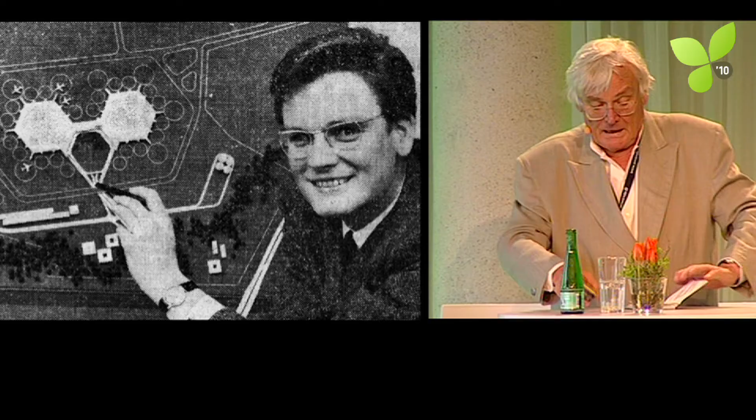It is called TXL Plus. I have to explain what that means. TXL is the code for Tegel Airport, Berlin, which should be closed next year on the 10th of October, because the new airport in Schönefeld, also designed by us, will be finished at that time, and there is a political agreement that the other two airports in Berlin should be closed.

I have to tell something about the background, the history of this project. It is the first large project of our office, and what you see here is a picture showing myself as the winner of the competition in 1965. So this is already 45 years old, like my hair.

I was asked 18 months ago by a representative from the Berliner Senate to make a proposal for what could be done with this piece of land. It is a huge area located very near the center of the city. I think most of you have used this airport one time or several times.

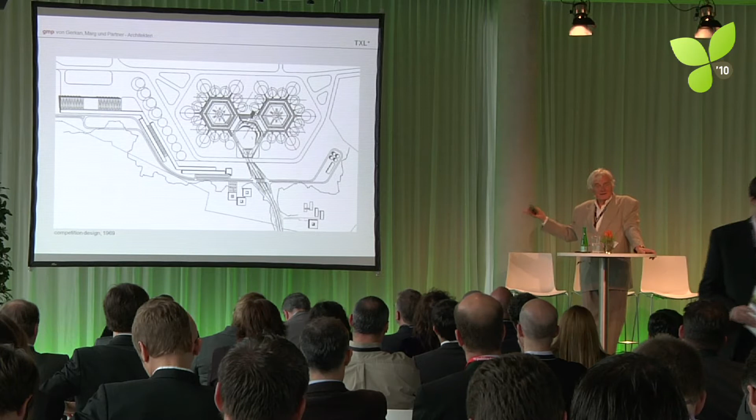That was the original drawing from that time, done with ink on translucent paper. Now we do all this work by computer, but that was at that time. Even then, we didn't learn such good English as you do now, so I beg your pardon if I have some problems explaining myself. I need the pictures - they will speak their own language.

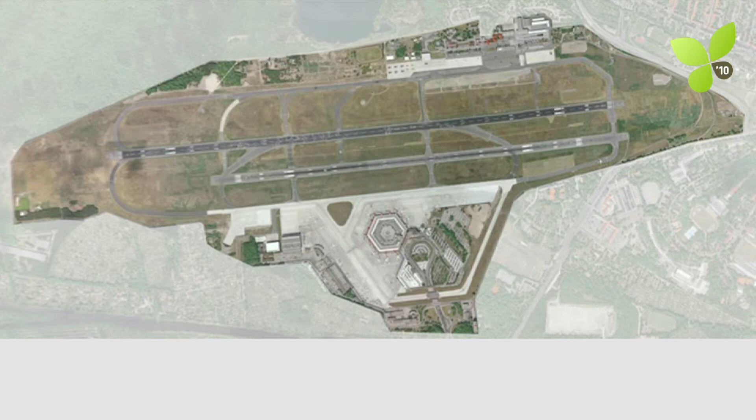My idea was for this whole area - shown here from a bird's view - only the left hexagonal ring has been realized. The second should be an extension, but it has never been realized, and it won't be. The whole area has a dimension of 466 hectares, and only a small part of the whole is covered by buildings.

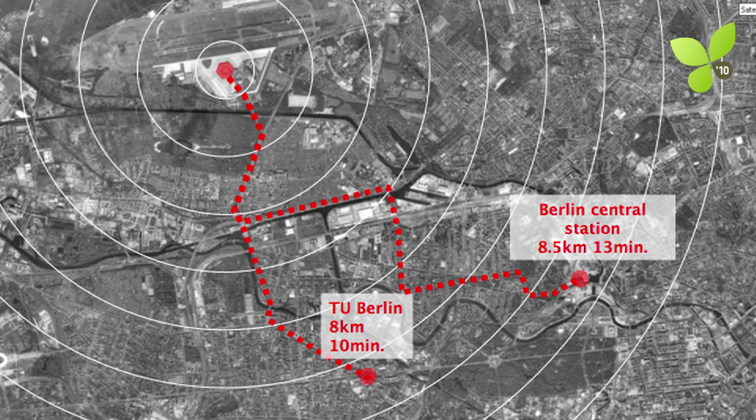All the space would be free to do whatever the city intends to do. I proposed the idea 18 months ago to keep most parts of the area in natural condition - landscaping, greenery - and only the south part and the piece between the two runways should be used for buildings, but for very, very special buildings.

But this whole city shouldn't be just a city. It should show only buildings which are in very tight relationship to the needs of saving energy, of sustainability, and all those aspects - no other building should be allowed. We discussed it for half a year, nearly three quarters of a year, and up to now everybody has agreed with this idea.

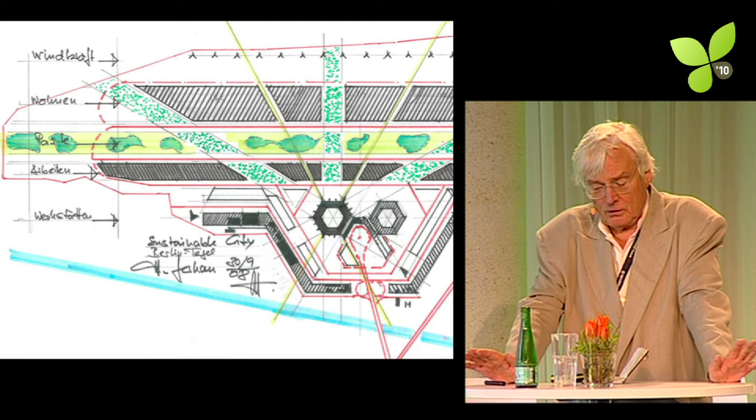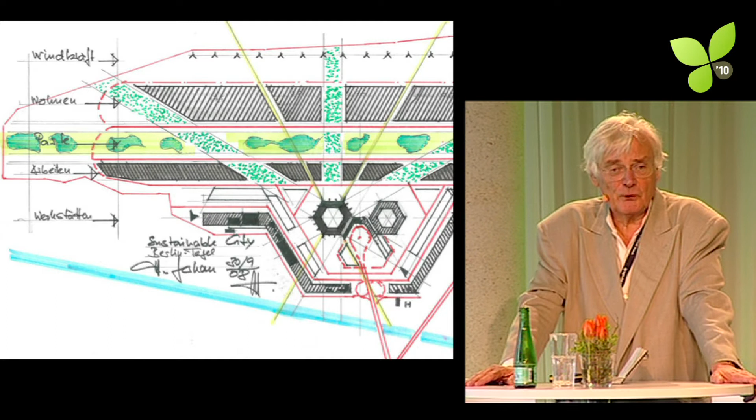There is no dissent between any political direction - they all agree with it, and the only question we have to answer is who will be willing to use this area. When I got to know Mr. Weber on a train, he told me about what he intends to do here, and invited me to give a speech today, and I think you are the clients. You are invited to take part in this opportunity.

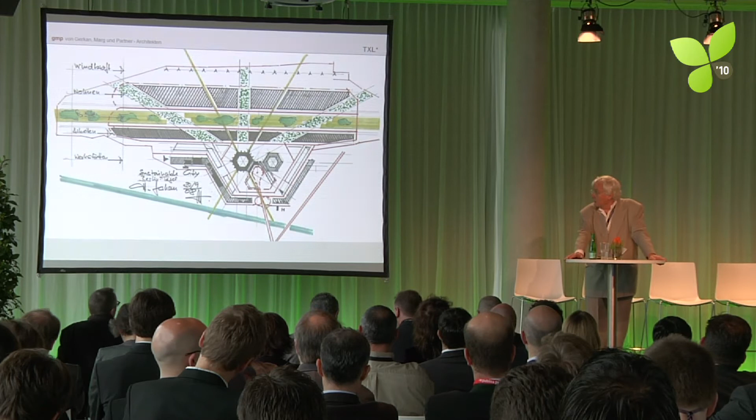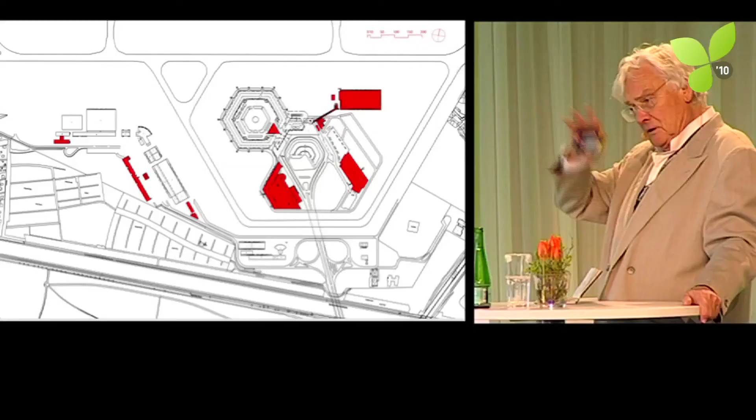You have the chance to go to this place, to have a showroom there, to do research work, and - I'll show this later - you will even be able to have producing facilities in the extension of the whole area. But at least there are some separate buildings which have been built in the meantime, over these 40 years, because the whole capacity at the beginning first stage was only 2.5 million passengers, and nowadays they have 14 million.

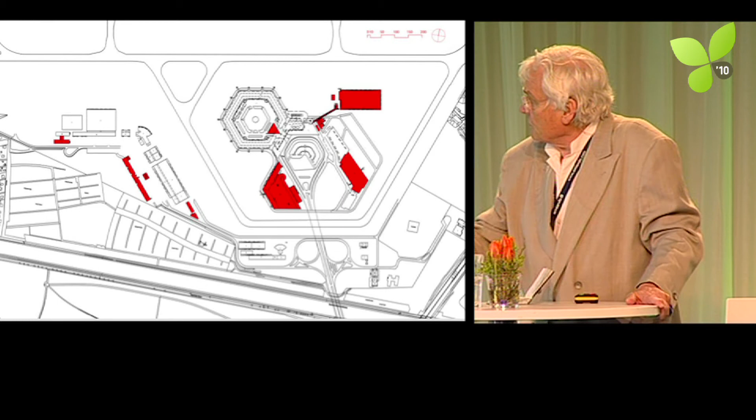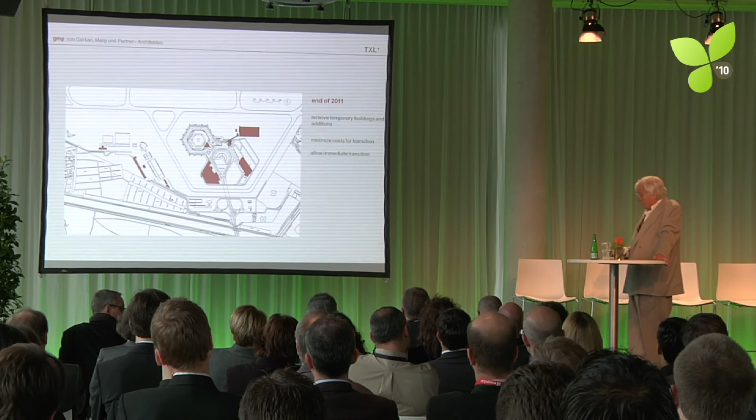All those parts shown in red color, we intend to remove, to bring the building back to how it was at the very beginning, the original experience.

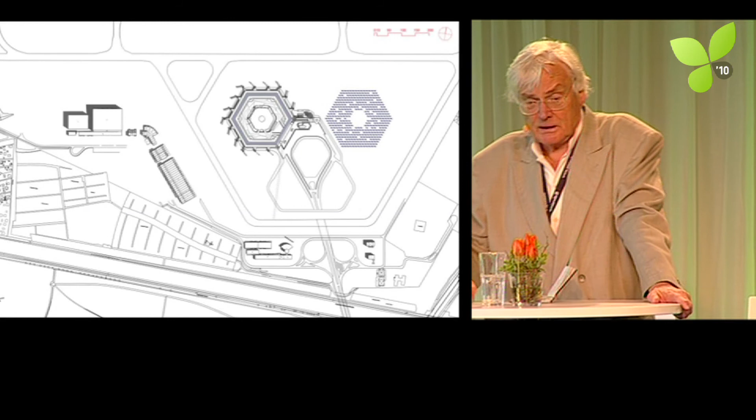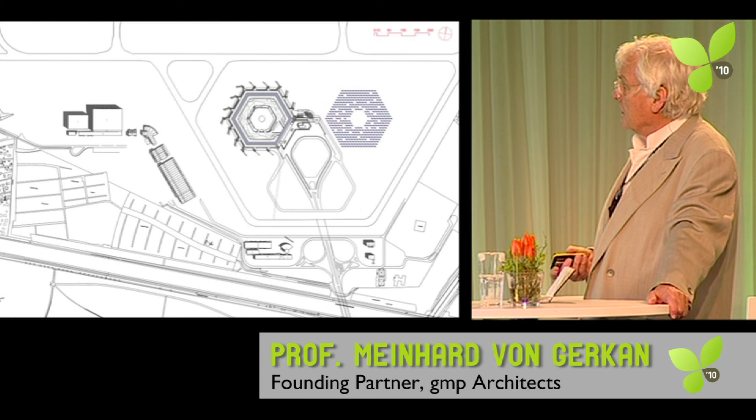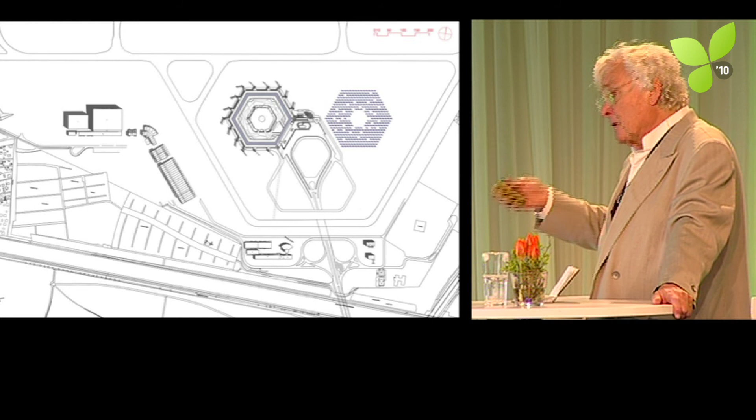One of the ideas is to have, in the same dimension as the hexagonal ring on the right hand, a second ring that could be a solar park with photovoltaic, as well as wind power towers inside. This building should generate the energy used for the existing building - only for the existing building - because they could only be brought into a better condition at a very high expense.